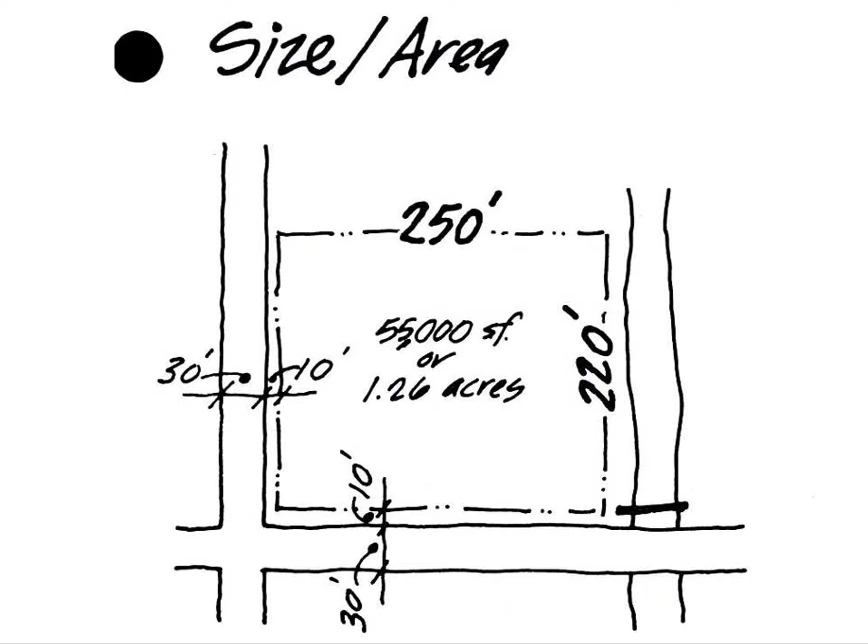We're going to want to find out setbacks and easements, and you can get that from the county. Anytime I started a project, I called the county or went to their website to find out how close to the road or property lines I could build. Those are your setbacks, your easements. You may have to have 30 feet between the property line and the edge of your house. Setbacks and easements often have to do with things like utilities or sidewalks. They may later want to come in and do modifications, and they don't want to have to tear down your house to replace pipes or access underground utilities.

They may want to come in later and put in a sidewalk, and now you have people walking right past your house. I know you've seen this, because there was a time when setbacks and easements weren't considered the way they are now. You'll see, especially in some urban areas, you'll wonder how people live there because the sidewalk is literally right outside their house. So that's something important to know, because you don't want to violate that.

Also, there are setbacks between properties. I know there are houses built very close together, but some counties don't let you build that close because of fire. If one house catches fire, there's a certain distance a fire will jump to the next house, and you'll set the whole neighborhood on fire very quickly if your properties are too close together. They may also mandate certain materials—like in commercial buildings, you have to use concrete block as a firewall between properties that are close together to ensure the fire doesn't jump. You can't ensure it, but you can reduce the risk.

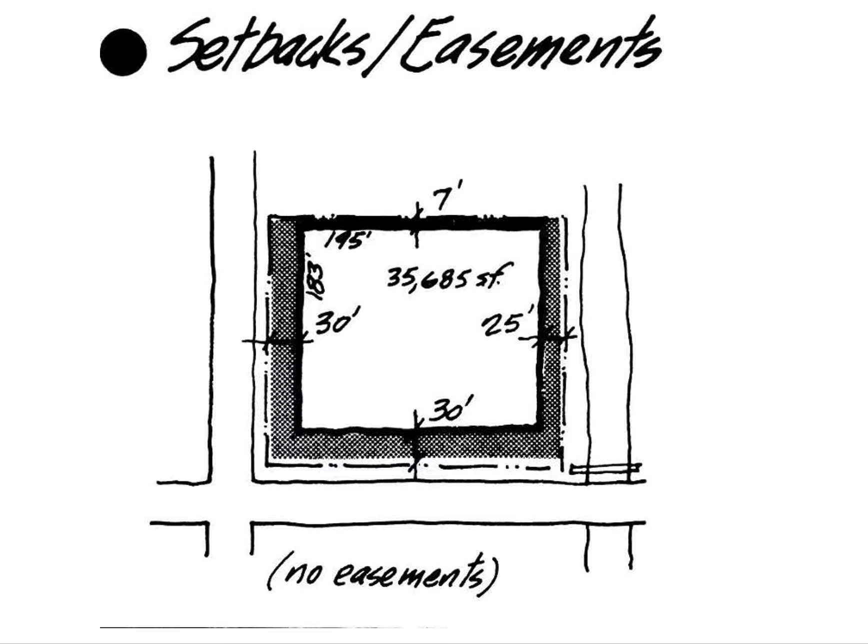Though literally one fell not far from my house down the street not that long ago—it just got really top heavy, and it was in an area of erosion that had worn down so the roots weren't tight. But oak trees have very deep root systems, so they tend to be trees you don't mind so much building your house under. It's very unlikely that they're going to fall.

Now, a branch could fall—it happens in my yard all the time. I have massive oaks at the front of my property, and branches will fall off, so you do have to consider that they can do damage on the way down. But pine trees are softwood, while oak is hardwood. Every one of my neighbors has had at least one pine tree fall on their house. There are no pine trees around my house, so that's something to consider. You want to make sure that if there are a lot of pine trees, you either don't build close to them, or see if they're trees you can remove and replace.

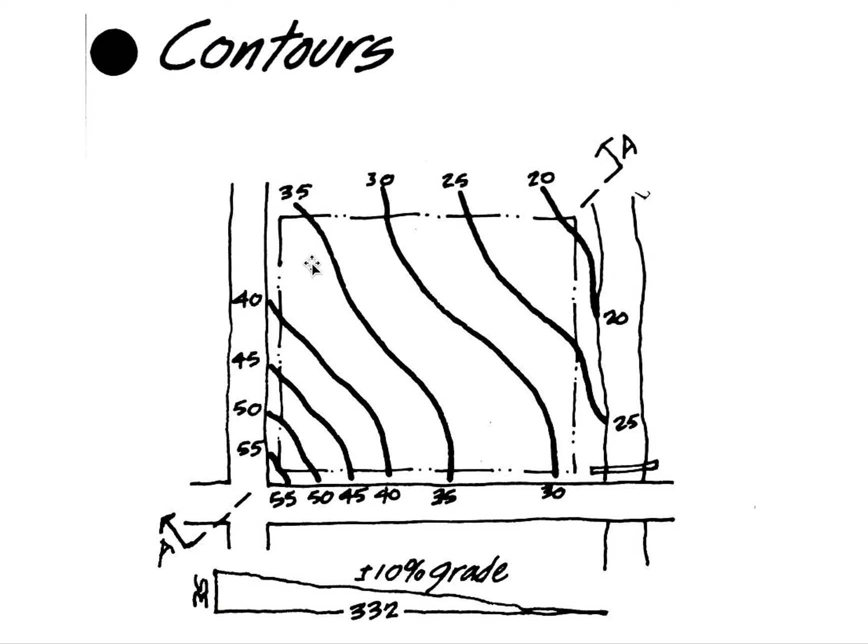But also you've got all this water running down. And while it might be great to be on the lake, if you decide that's where you want your house, that's where your client wants the house, you're going to have to devise something to get it up so that you're not dealing with flooding.

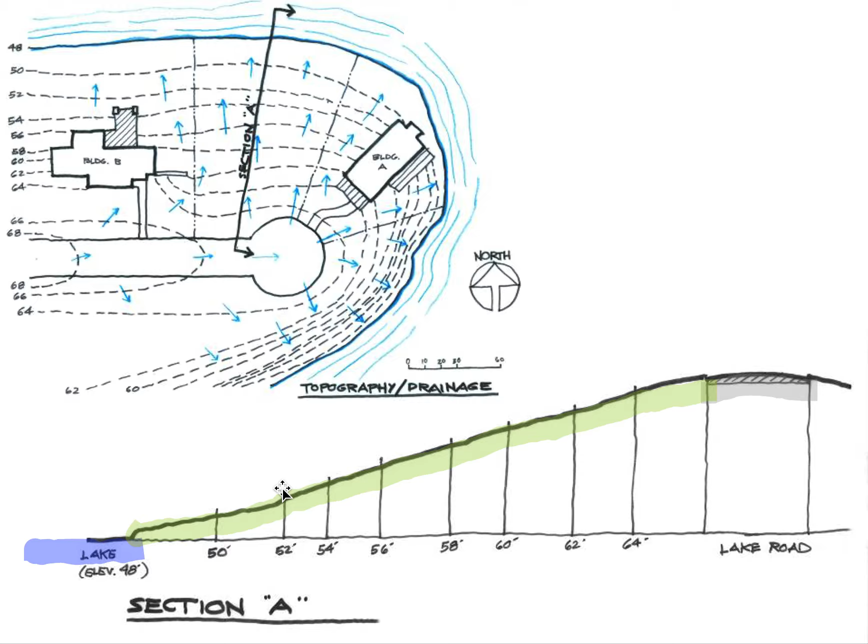You want to note, if you can, the drainage. Go there on a rainy day, see what's happening when it's raining. Where does the rain drain? Where does the water drain? Because just based on this alone, you're getting a lot of drainage here. I'm not putting my house right there without serious consideration about what needs to be done to change it.

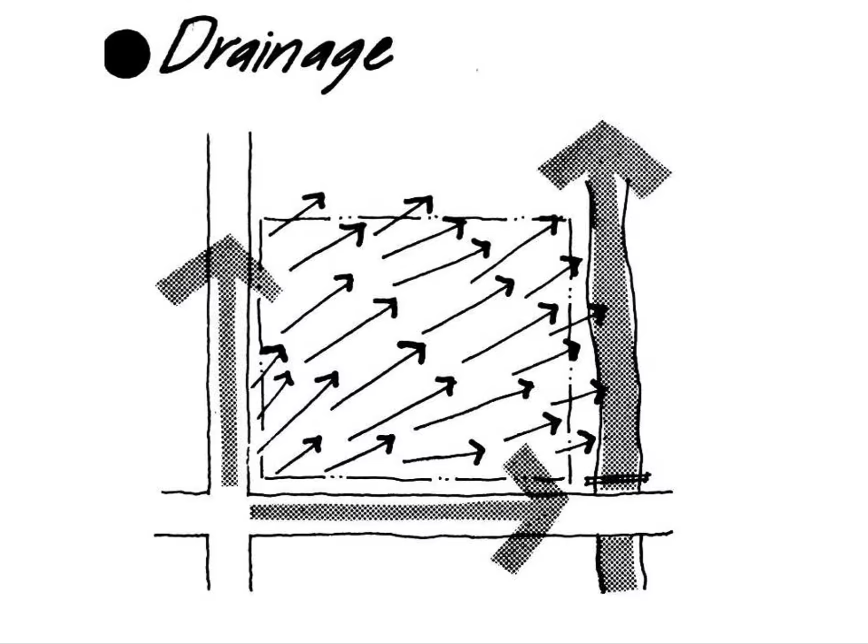Where are the utilities? You can get utility maps. The county carries these. It should be part of the plat that you have when you either purchase the property or look at the property. The county has these and will allow you to look at them. I don't know that all counties allow you to take them unless it's your property, but you can certainly look at them to see where the utilities are.

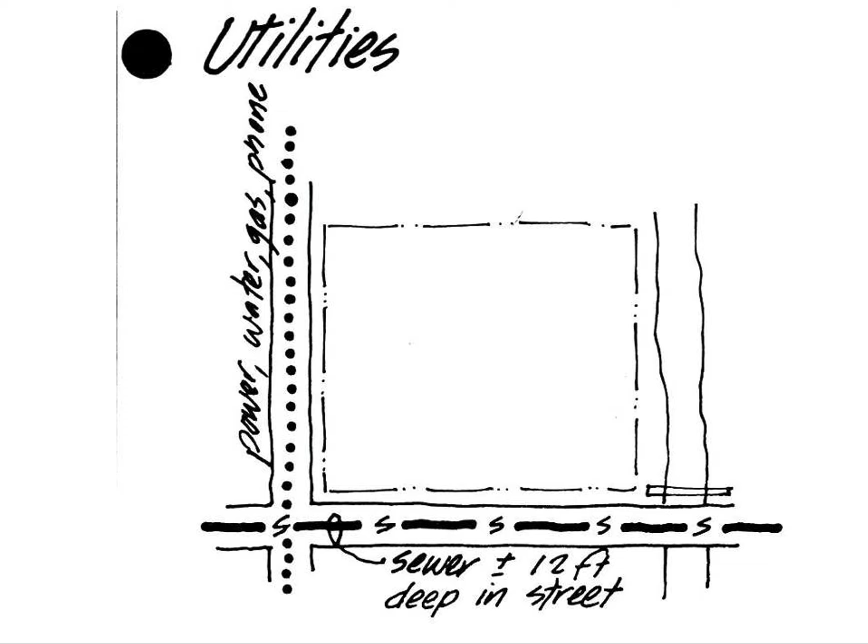The utility companies don't want you doing anything that's going to make their lives difficult, so they often will help you garner this information because they have it. They have as-builts, and an as-built means a drawing that shows things as they have been built. So utility companies will have as-builts of where utility lines are. You can call them and say, hey, I need this information. They'll be more than happy to work with you.

Where is the traffic? This is really important. Stand there and watch the traffic, make notes about the traffic. Now, obviously, traffic is going to be different at 8 o'clock in the morning than at 10 o'clock at night, and it's important to visit the site more than once to garner this information. Because if there's heavy traffic at 10 o'clock at night and your client has a job where they have to work early, this might not be a good fit.

If it's no choice and you have to use this property, consider these things. Watch where people go, especially during high traffic areas. People walk up and down the creek right next to this property. Does the property line go to or cross over it? Is this a designated path? Will you need to create barriers? You want to know all this.

What about wind? You have to know that the wind in the winter and the wind in the spring are different.